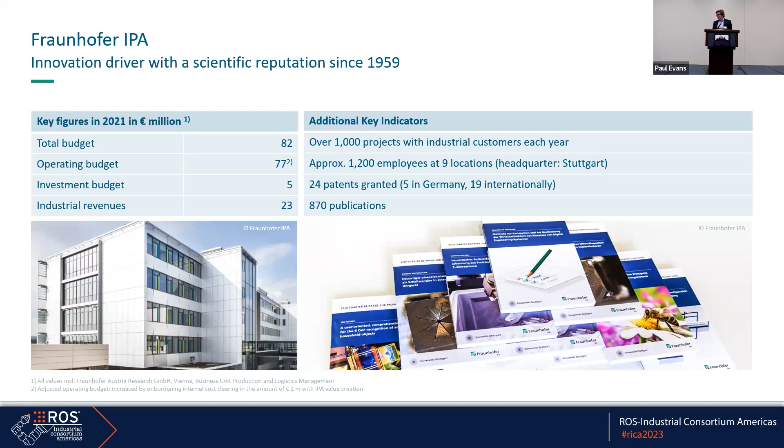In Fraunhofer IPA, we have the robotics department, which I come from. That's roughly 70 employees, also one of the biggest robotics research labs in Europe. We have roughly 40 robots right now, going to increase in the near future. 8 teams focus on different areas of robotics: picking, packing, welding, industrial service robotics, assistance robots, robot programming, software engineering, and assembly automation. The latest addition is basically robot safety.

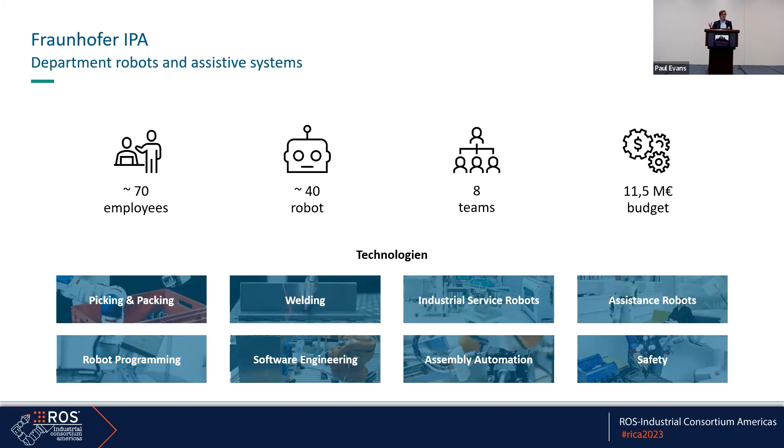With a budget in the realm of 10 million euros per year. So that's a short presentation of what we are doing at Fraunhofer IPA in general. And the institute itself has a pretty long history of supporting and using ROS throughout the years.

We had some people going over to Willow Garage in the early days, 2009 and 2010 I think, for internships. At that point we were developing a service robot called Care-O-bot 3, and that was basically the first robot that we switched over to ROS, because we saw ROS is really a nice framework for service robots. And yeah, that went on.

Then we started prototyping ROS Industrial with Southwest Research Institute. I think we started with the European Consortium somewhere around 2014. Since then we've been developing a lot of technologies, using ROS in many projects, and have also been very active in creating some spin-off companies based on ROS.

With some on-top technology - for example, Mojin Robotics is a company that sells the Care-O-bot technology. We have drag&bot, which was around simple robot programming, that is now part of Keba Robotics, Keba Automation. And Node Robotics is our newest startup, basically focusing on robot navigation.

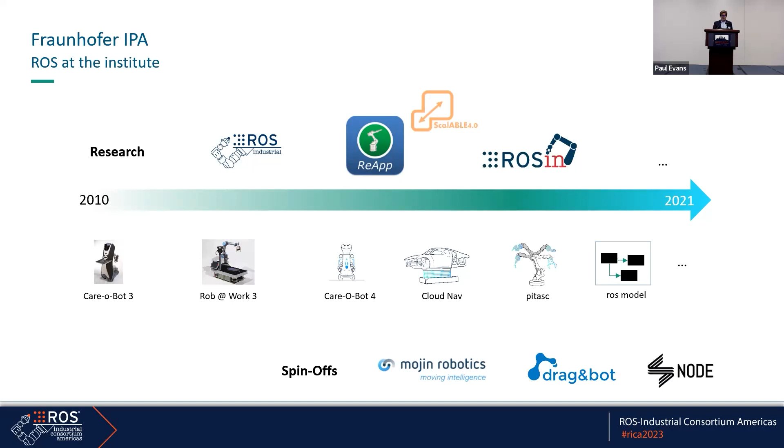These are some of the technologies that we develop with ROS. Let's see how that works. One thing we lately did was cabling - looking into cabinet assembly and how you basically get the cables connected. This is just an early prototype, but it could already take information from an ECAD system and then do some cabling. Force-based assembly is one of our focus points. Navigation, you already saw, we had a startup ongoing there.

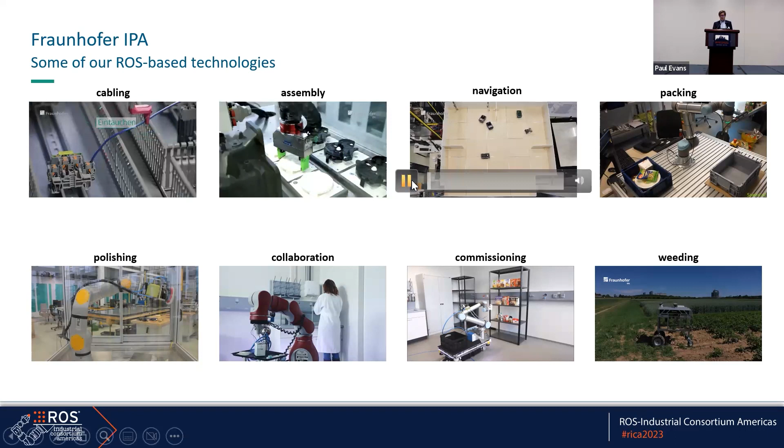Something new that we've been currently investigating is basically packing - essentially, from a bunch of objects that you get, how do you create the best packed box. In the hope that at some point we don't all get something from Amazon that is packed like, I don't know, 98% air and the rest is the packer, instead of what you actually want to get.

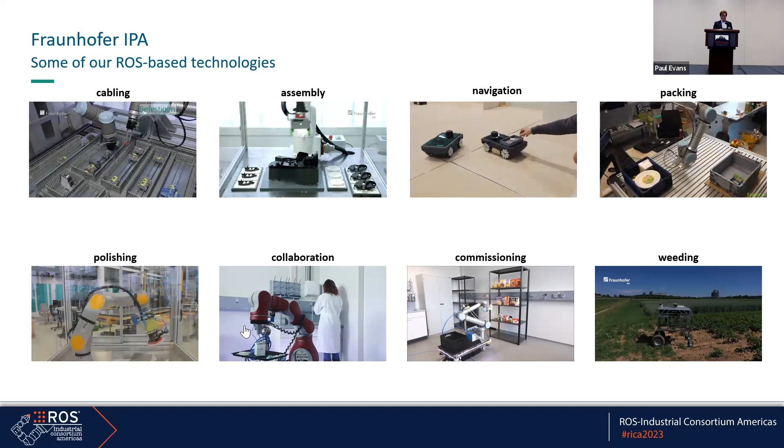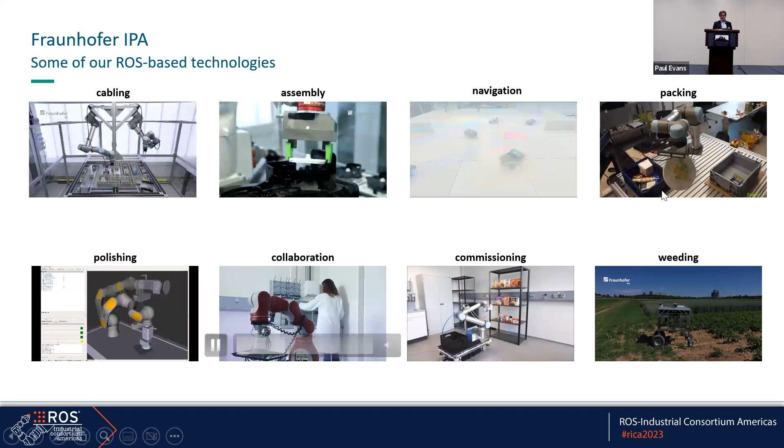Polishing, okay, with scan and plan, that's something we do in ROS Industrial all the time. We had a collaboration in the clinical area, healthcare area, commissioning, and lately as well, we've been investigating weeding. So we're now also starting to go into the agricultural area with ROS as well.

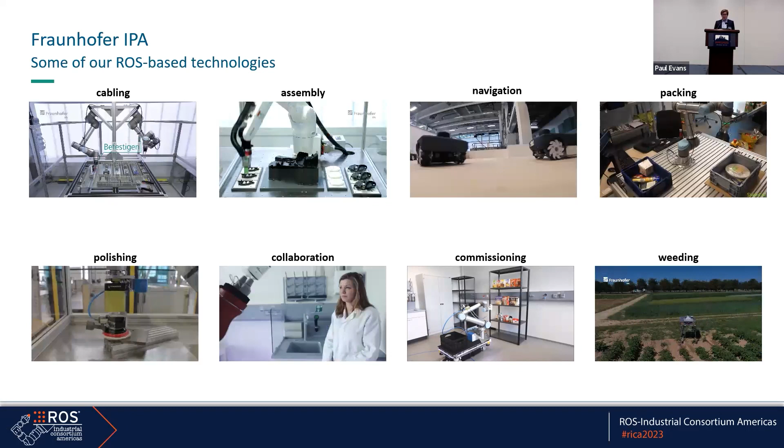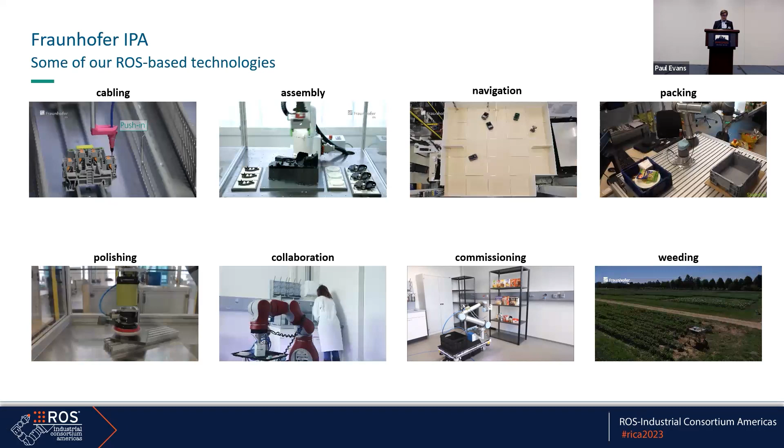Let's see if I can switch to the next page. Perfect. So now you saw everything that we do at Fraunhofer IPA, and now I'll jump in and tell you about what we do now in terms of creating robot cells.

That effort all started with this AI Matters project that we recently won. The goal there is to create some kind of testing and experimentation facility for automation and robotics. From our perspective, we just want to get people to be able to experiment with automation technology, new technologies such as ROS2. In total, this project has a funding of 60 million euros around Europe, so there will be 7 of these facilities in different countries in Europe.

We're going to develop a joint service catalog for testing and experimentation in automation and robotics. On one side, experimentation means you just experiment with the new technology, so that's more for end users. Then we have the testing part, which is more for technology developers who want to know if their technology works in a certain area as expected. The goal is to go towards some kind of standardized test and experimentation services in Europe.

Project runtime is 5 years, and it's funded mainly by the European Union, and then per member state, basically 50% is funded by the member states. So it's kind of a global European effort going on there.

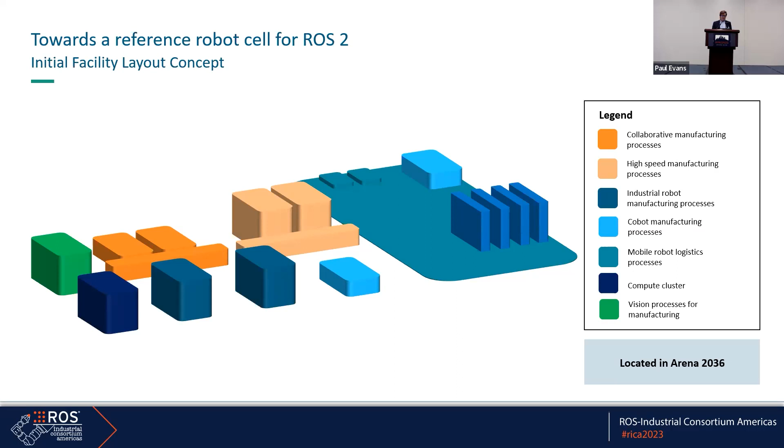I'm not sure if we're going to be able to train these very huge algorithms, but at least running should be possible. We'll also have a small vision lab for producing data for machine learning. So we've split this up into different infrastructure items.

I think the interesting part here is mostly what kind of test beds we'll have. For robotics, we'll focus on manufacturing test beds, basically the production lines we're planning. We'll also have a robot assembly test bed, which is something you put into the cells to do tests with robot assembly.

We'll have robot behavior test beds, basically sensors that measure behavior of the robot, for example accuracy or something similar. We plan the same thing for mobile robots, and finally also a test bed for robot welding. That's what we're going to start with, and we hope to have that set up by Q3 next year.

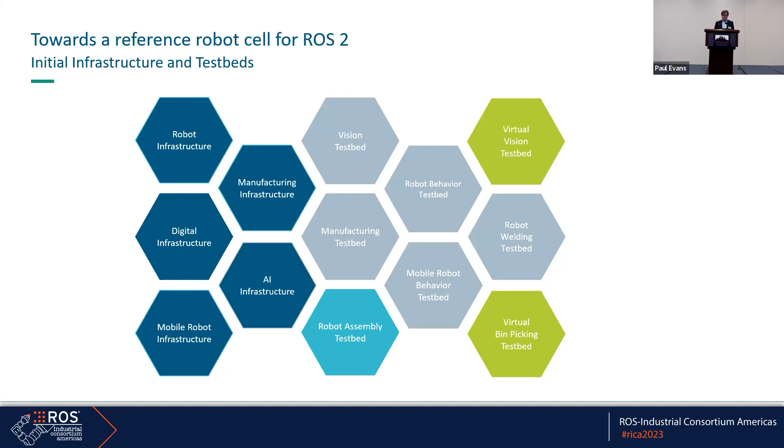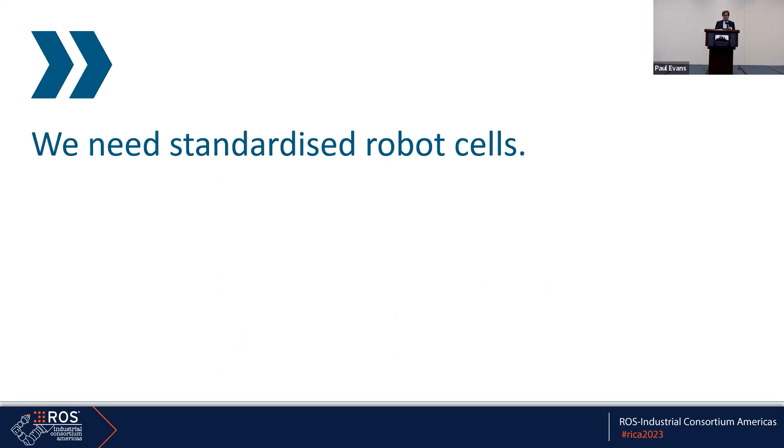But what do we actually need for having all these test beds? Our goal is to have a standardized robot cell that we can put that stuff into. For that, earlier this year, we started a small survey to capture what people actually expect from robot cells if they use them.

Trying to build a cell that covers everything is certainly not possible, so we took the average of all the answers to have something most people can use. In total we got 24 responses. Not the world, but I think it already gives an overview of what people are expecting.

So in the end, the answer for us was that we should focus on something like 10 kilograms of payload and a bit above 1 meter of reach. The most wanted robot manufacturers in that survey were Universal Robots, ABB, and Fanuc. Not sure if we can do the Fanuc stuff though in ROS2.

In terms of sensors, people were mainly looking into using RGBD sensors or force-torque sensors. That's basically the main sensors they were asking for. For effectors, it'll be finger grippers and vacuum grippers, and depending on the application you usually need something special. In terms of peripherals, we got answers that mostly EtherCAT, CANopen, and digital IOs were common.

I think CANopen is more a thing from the ROS world, I suppose, or maybe that's from the group that we asked. On the right you see the applications the respondents were working with. Pick and place and assembly are the most common ones, and then there are a few other applications people were also working with.

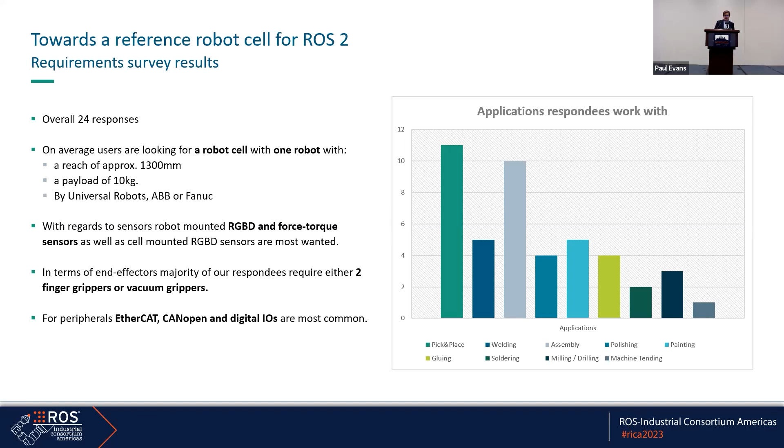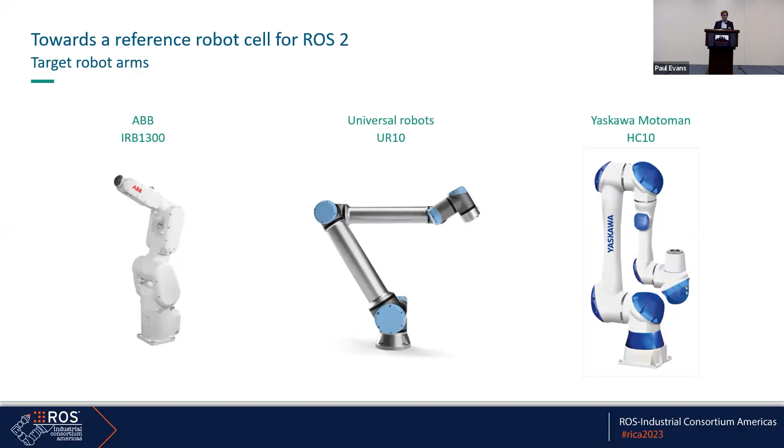So what we are going to focus on in our first cells - we will also buy a few other robots, but the first ones we're focusing on are these three: ABB IRB 1300, UR10, and the HC10. They all have the payload we're focusing on, plus they have ROS2 drivers, yay.

For the cells, we'll also build in some PLCs. We chose these two because for PLCnext from Phoenix Contact, there's a driver, a ROS2 bridge ready. And Bosch Rexroth also has the capability to run some stuff in a Docker image directly on the PLC, which makes it easy to create a bridge there. So that's basically the plan in terms of hardware.

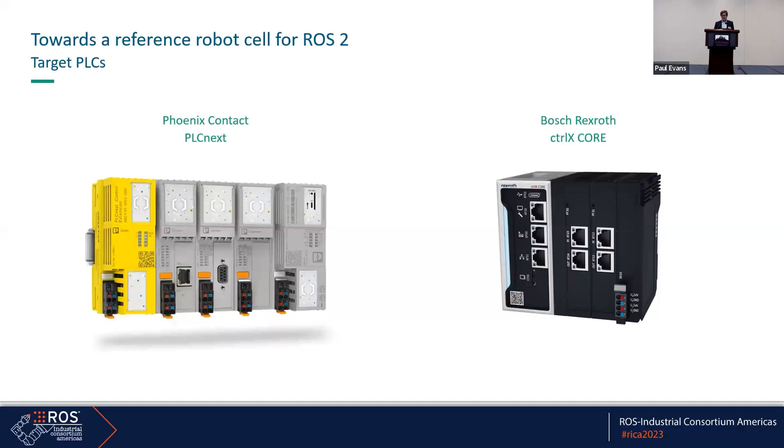We're currently prototyping this - a system integrator is going to build the cell for us, but we're currently creating the specification for the cell, I think. So what do we actually want to have in the cell? What kind of doors, and what should be removable so that you can use it. I probably don't have to go into detail here, but just so you can see.

One thing I think at least in Germany is kind of a standard in these research cells is that you have these welding tables with a 50 millimeter raster, which are super nice to remount things. That's probably going to be in there as well.

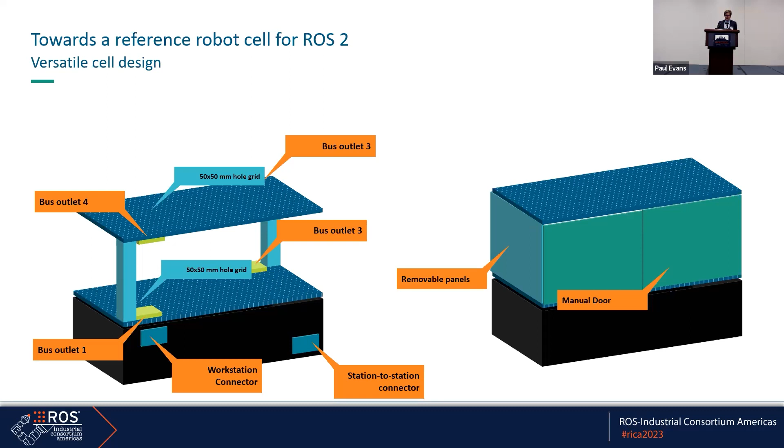So what are we going to offer? In the end, what we're going to open source is basically the CAD design for the reference cell we're building, along with the BOM, also open source. So people can just rebuild what we're developing here. We're also going to provide working and tested container images with ROS2 software. That's basically our goal in terms of open source services.

In terms of commercial services, as I said, we have this bigger project on top of it around testing and experimentation. There we'll have services for assembly, welding, general manufacturing, automation, and robot accuracy or robot behavior in general that people can use and ask us to perform, or do themselves in those cells.

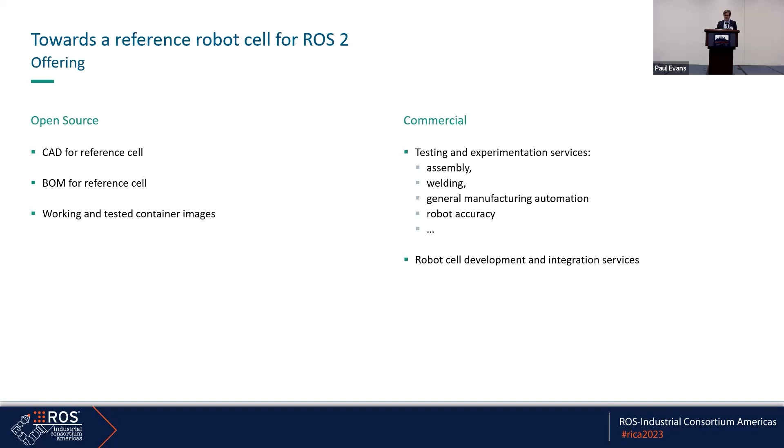Finally, we also plan to offer help for people to customize this reference design to their needs. So once we have it published, you're welcome to contact us if you'd like to build a cell and use the reference design or adapt it to your purpose.

What's the timeline? I think the first cells we're going to set up at the end of this year, hopefully, depending on ordering times. You all know it's pretty hard these times with hardware. We're planning to publish the first release of the software composition, basically the container images, somewhere around Q1 2024.

We're also looking for a little bit of feedback. So if you saw something here that you don't like, or think we should do something different, just talk to me in the break and give me your input. I'm looking forward to it.

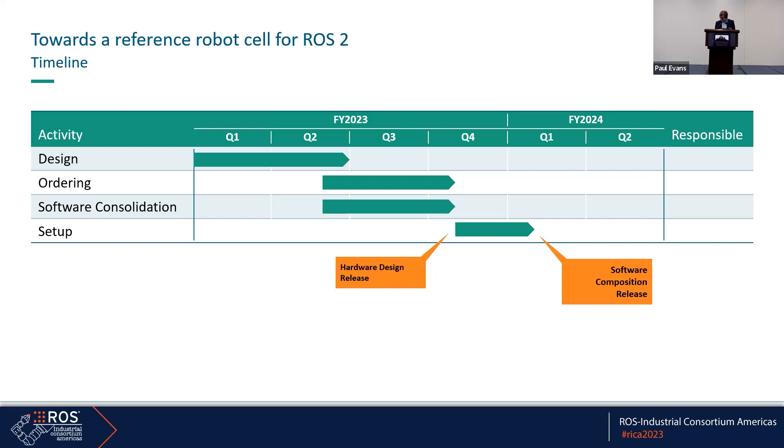Well, let me just check how much time do I have left. Nine minutes. Okay, yeah, I get that.

So that's basically around that project. I also brought a few news about other projects that we've been working on in Europe lately. One of my favorite projects right now is ROS 2 CANopen.

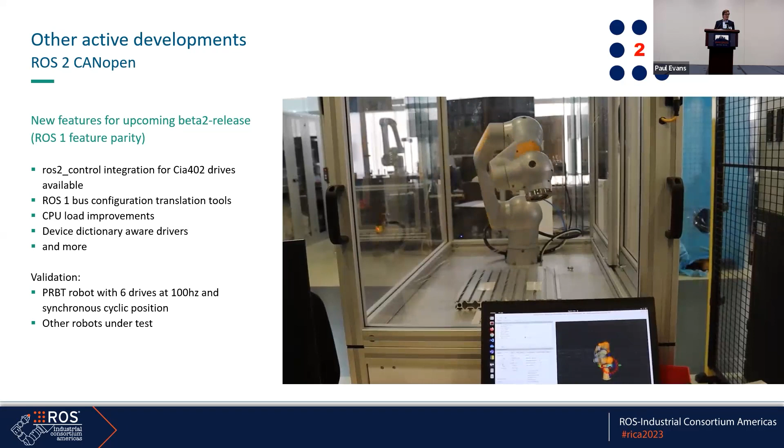That's basically the redesign of the ROS CANopen stack that we had in ROS1. What we did there is actually switch out the base layer, so there's a completely new CANopen library that runs it. We took that from Lely, one of our ROS-Industrial members that basically maintains that. Super nice stack. It's written in C, so it's a bit more difficult to integrate, but I think later on we'll have the benefit of having a really, really stable stack that's already running in very many devices.

We are now closing in on the beta 2 release here. We have now ROS2 control integration for CiA402 devices. For those that don't know what CiA402 is, it's motion controllers, basically the profile for motion controllers. You see that on the right, for example, that's the Pilz PRBT robot, a 6-axis robot that basically has all the drives running on CANopen.

There was a driver in ROS1, and we ported that now to this stack in ROS2. Works pretty nicely. Still having a few minor issues with vibrations at times, but I think that's actually a real-time problem in the end. It's running at 100 Hertz, the 6-axis, looking great. We're hoping to release this as a beta 2 release pretty soon.

The only thing that's mainly missing right now is documentation. So that's what we're going to work on this summer, and then we'll have a nice release that people actually can use, hopefully.

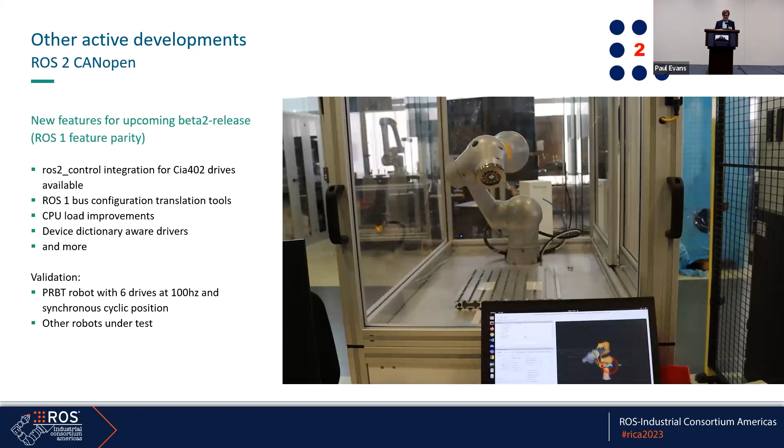In terms of what's going on in the EU, I think Matt already mentioned that. So we are having the ROS Industrial Conference 2023 for once not in December. I'm super happy about that, other people might not be. It's going to be in Bordeaux, France. It's going to be good weather there, very nice and shiny, with a lot of nice wine to drink.

If you want to come, there's also going to be a visit to the Cité du Vin, which is basically a small museum with wine tasting and that kind of stuff. Plus, it's co-located with ROSCON France, so if you speak French, there's also going to be a few English talks there, but if you speak French, I think it's also a good thing to attend.

And then there's also the RoboCup. I'm not sure if you're aware of it, but it's basically this big convention of competitions around robotics that mainly students attend. So there's going to be quite some crowd around robotics there. I think it's going to be a really nice event.

Another thing we've started up again is ROS meetups in Stuttgart, Germany. We're going to have the next one in July, so if anyone wants to fly over, you're welcome. It's going to be at Bosch headquarters in Renningen, which is pretty interesting as well, I think, to see - they have all kinds of robotics research going on there.

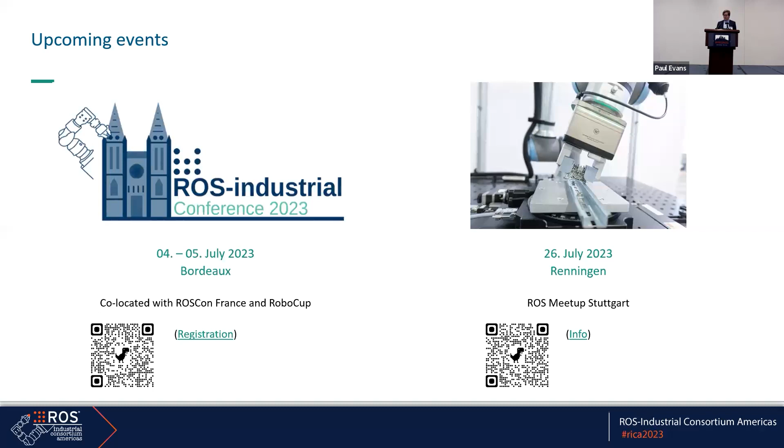Yeah, and that's all from my side. I think I stayed a bit under time here. But yeah, thank you very much. And if there's any questions, just ask or meet me later in the break.